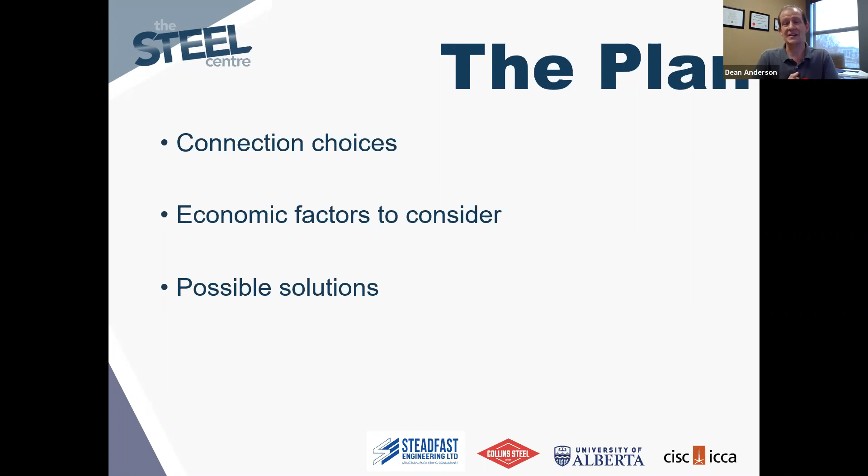So how hard the wind's going to blow, the snow on the top, the loads that are inside the building, if you have machinery or people or whatever it may be. And the software helps with the design of these members. You can kind of hit go, start, and let the thing run. And oftentimes the software can be set up so that it optimizes the weight of the structural steel in the building. So the software will spit out a whole bunch of columns and beams and braces that are the lightest possible.

And that, again, might be the best way to do it, but it might not, depending on the connections in a building. At this point, the connection design isn't completed yet. The engineer is really just looking at the beams and the columns and the main members of the structure.

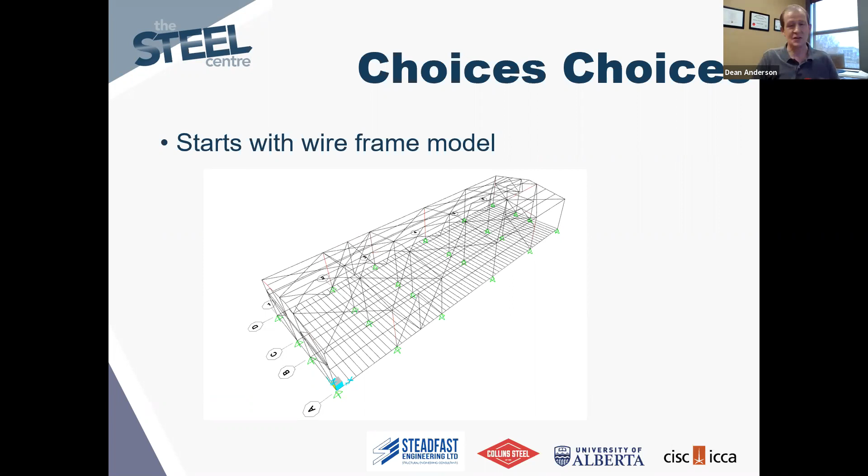Then a fabricator is hired. So the guy who's actually going to make this stuff, he's going to weld it together and put it up in the field. And this is where the connections really start to get discussed in more detail. Again, this is a bit of a generalization. There are times when the fabricators are involved earlier in the process, but in general, this is the way it happens. The structural engineer has designed the building.

He's chosen all of his columns and his beams and his members. And then they hire out a fabricator. They say, okay, we want to hire Collins Steel to do this structure and fabricate it and build it for us. And that's when it starts getting looked at in more detail.

They'll hire, depending on the fabricator, they might hire somebody like me at Steadfast. We specialize in structural steel connections. They hire us to design those connections for them. Collins Steel has their own engineers on staff, so they'll look at it themselves. But this is when, in a project, the connection design really starts to get looked at in more detail, starts to get figured out.

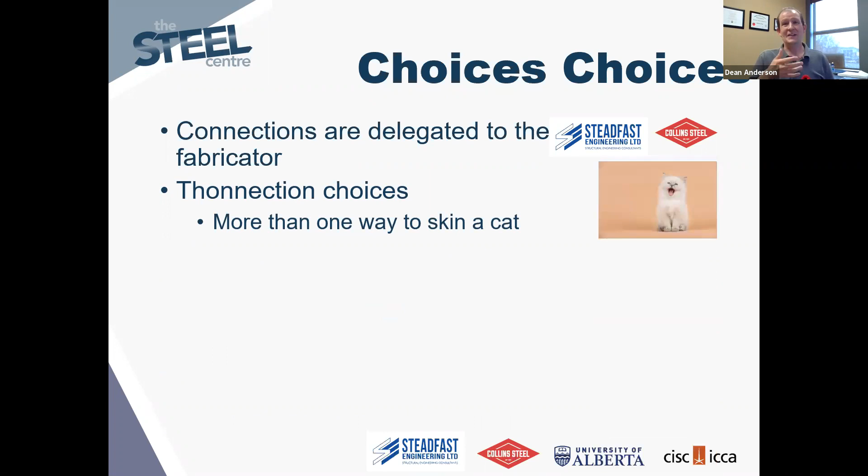And the reason for this is that there's so many different ways to connect steel together. You might have heard the phrase, there's more than one way to skin a cat. And I don't know, I find that phrase kind of horrific. So we'll change that. We'll say more than one way to peel an orange. I think that's a lot better. The cats will like that for us.

But often the fabricator has different machinery, has different processes, has different ways to fabricate the connections. And so they want the connections to suit their process to lower their overall cost. So that's why the connections are waited to design until this point, until the fabricator is hired so they can have that input on how the connection is designed.

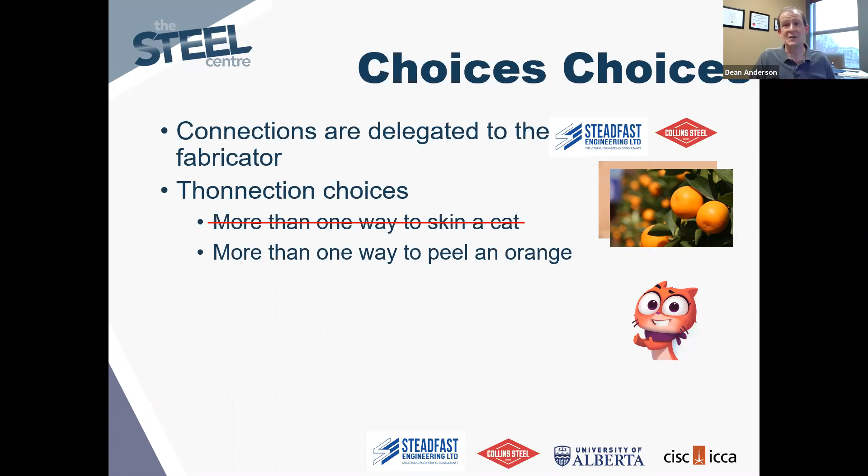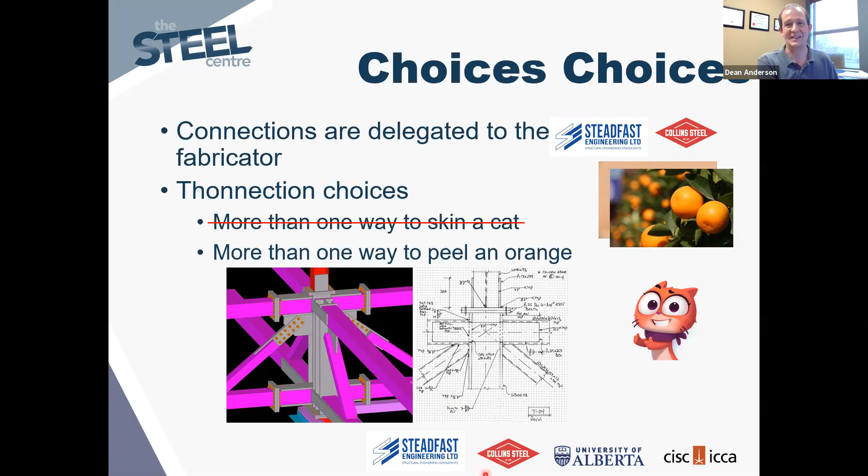So let's get into some simpler connections. Let's look at what is involved in some different connections that are out there, so we can see some of the variety and the choices that are out there.

Beam to beam: we have one beam and another beam that's going to connect into it, so one beam is supporting the other. You might think there are limited options, but there's actually a lot of different options. We're going to look at three. As you watch, try to think of the number of parts involved in each connection, and the amount of labor it might take to fabricate and create it.

The copes at the top can be quite labor intensive, because if you don't have a certain machine that will do that for you, there's a guy out there with a torch who's got to mark all this out and cut every one of these copes. If you have 1,000 of these beams, you can imagine that's going to have a pretty significant impact on the project.

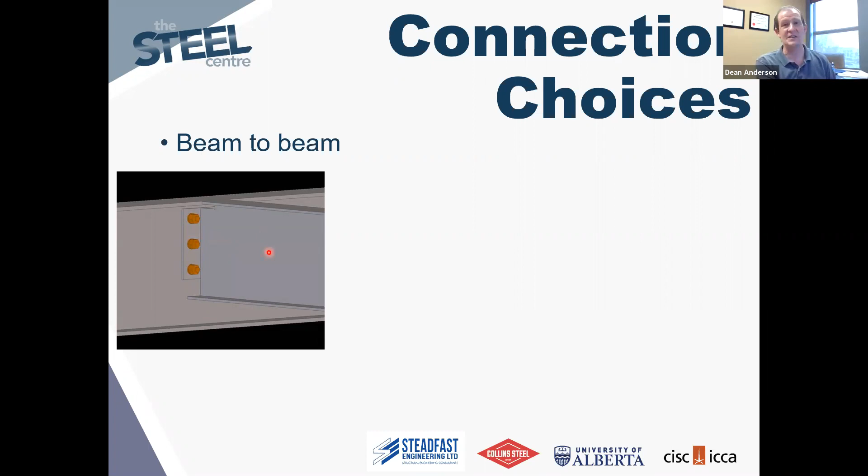In the end plate, you would have to weld that plate to the end of the beam. In this one, you don't have to weld. You still have the cope at the top, so that's kind of a wash, but you don't have that welding, so that could be an advantage depending on the fabricator.

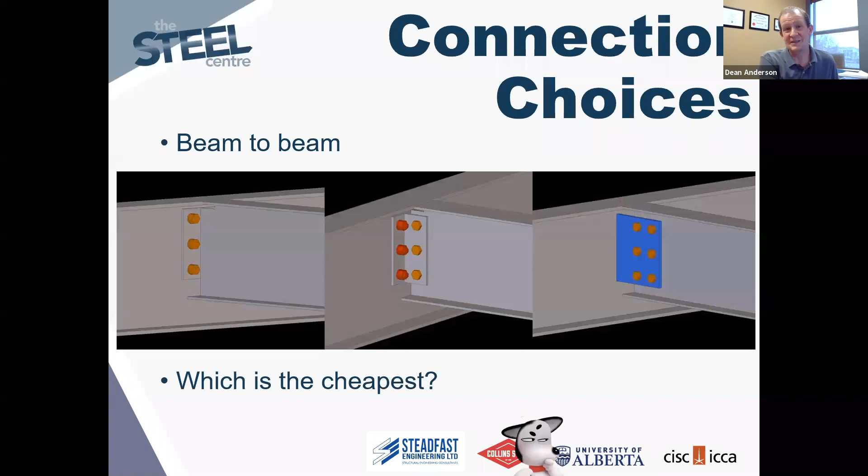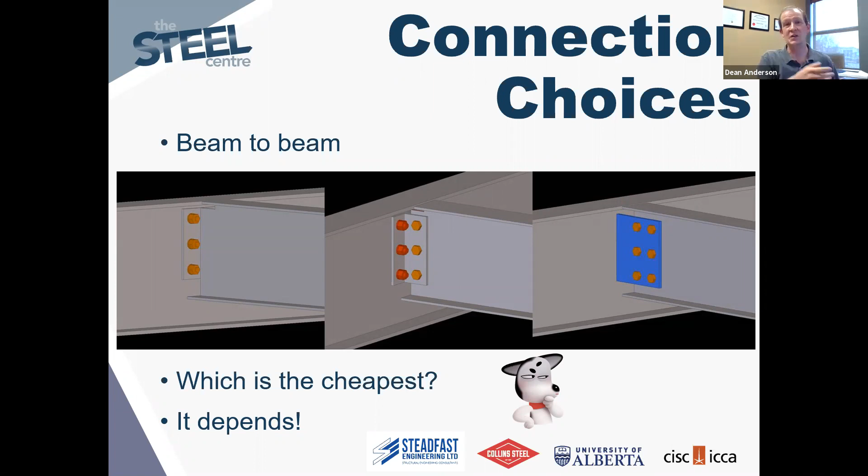So which one is the cheapest? You think about it, and it really depends—on the fabricator, on the machinery that they have. These are some examples that Brendan's going to look at in more detail for this beam-to-beam connection, showing the economic factors that will go into your choice of how you want to do this.

So in general, if you want to do your welding, it's better to do it in a shop. In a shop you're in a much more controlled situation. You have your welding machinery sitting right near you, and you can arrange your pieces on a bench in front of you so you can improve the position you're welding in. You don't have to get up in man lifts and fly around in the air.

Weather is actually a pretty big factor too. In welding you have to have a certain amount of shielding when the welding takes place - there's a little bit of gas, depending on the procedure or welding method you use, to protect that application of weld metal to the joint. When you're in a shop, you can control that a lot better than in the field. If you're in the field and it's a rainy, windy, or snowy day, that will all affect your welding and how it works.

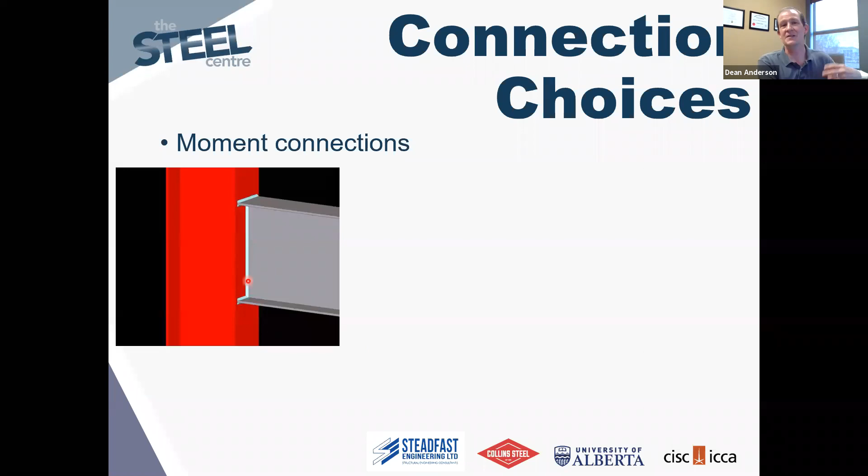So this first example is one way to connect a moment connection - a fully field welded connection. The second way is different: instead of field welding, you can shop weld all these plates on, and then add some bolts, so they can just lift this and put it into place.

So again, where is your labor spent? In this connection here, your labor is not really spent in the shop because they don't have to do much work there - they just cut the beam and column and send it out to site and let him deal with the issue. In this other one, you would have to do the work in the shop, but then in the field all you have to do is put the beam up, insert the bolts, and you're done. It's good to go.

The third option here is very similar to the middle one, except we have a bunch of reinforcing in the column. This is one thing that can affect - or the choice of your column size can affect - this connection. If you choose a column that's nice and strong and sturdy, when you apply this moment to the side of the column, the column can take it. You don't need to add in all of these plates.

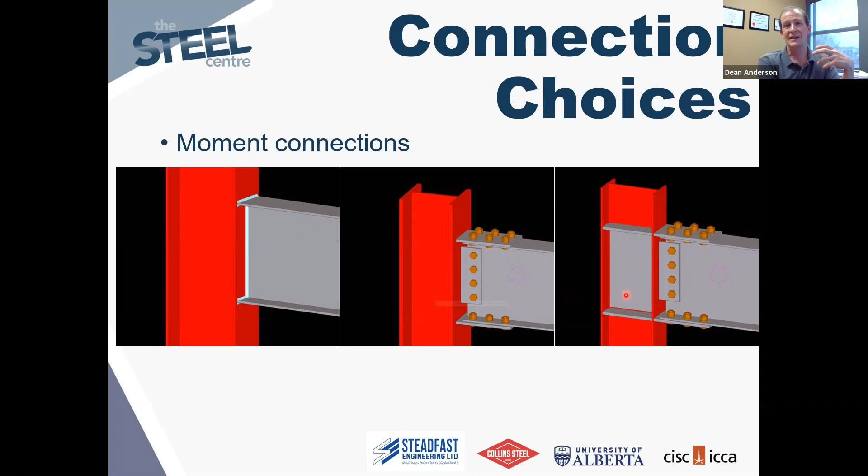If the column's not quite strong enough, you would have to add in all these plates. So we have some horizontal stiffeners here, and we have what they call a web doubler - a plate that reinforces the web, since the web might not be strong enough to take the forces in there. Again, this is a decent amount of work, so if you can talk to the engineer of record, you can say, hey, can this column be made a little bit heavier so we can avoid all of this shop labor?

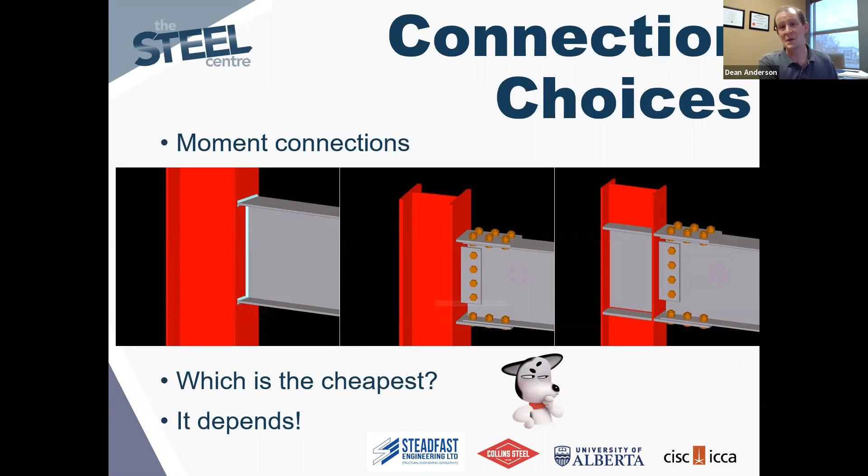So again, which is the cheapest? If you think about it, it really depends - depends on your situation, depends on the fabricator, depends on the erector, depends on how they want to do things. So it really depends on which choice you want to choose for the moment connection.

To introduce a couple of brace connections, we're keeping it simple here - we're just going to look at a couple of examples of very simple brace connections. In the seismic world, brace connections can actually get quite complicated and quite large with a lot of work involved. But this will give you an idea of the choice between field bolted or field welded, and where you want your labor to go.

So if you think of the number of pieces in this brace connection, we have one plate and four bolts. You have to take a torch and slot this HSS brace, this hollow structural section, and insert that and weld it. In this one here, we have way fewer pieces - you still have to slot the brace, but you don't have to weld it until you get on site.

So the erector will have to do this. He'll have to get up in a man lift and weld up here, then reach over his head, get underneath this, reach over his head again, and weld this weld that's underneath.

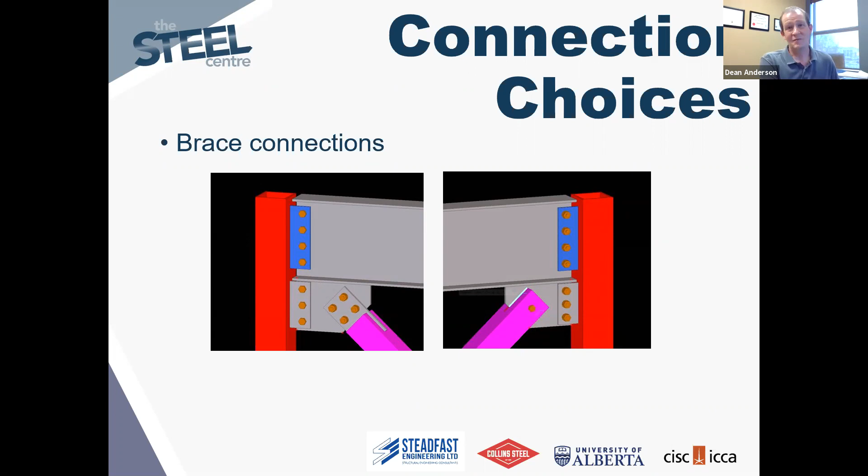So again, which one is the cheapest? It really depends on your position, where you are in the overall project. I think if you're the erector, this is going to be more expensive. And if you're just a shop guy who doesn't erect, this would probably be the least expensive for them, because then the field guy would do all the work.

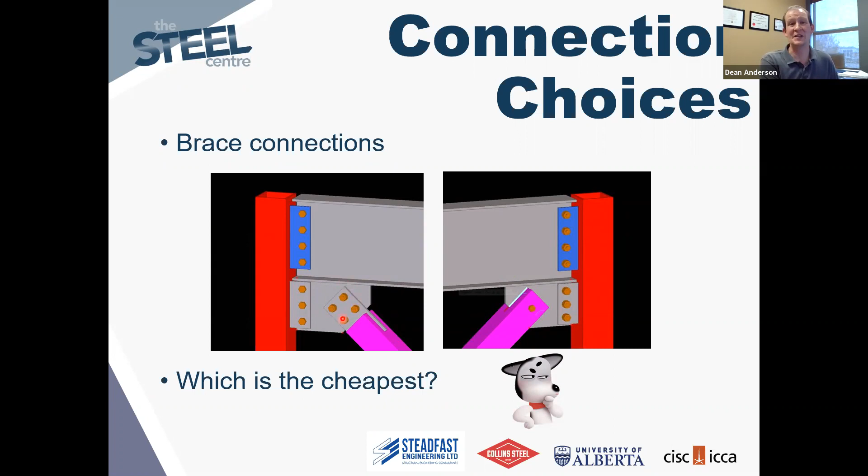So I'll hand it over to Brendan, and he's going to talk about some of these economic factors to consider. We kind of scratched the surface on some things to think about with respect to where the labor goes and how it's distributed between the shop and the field. He can talk a bit more in detail about the economic factors involved in the fabrication of structural steel connections. So I'll hand it over to Brendan.

Okay, thank you, Dean.

So as Dean mentioned, there are many factors to consider when thinking of economical fabrication. Dean's already talked about some of the ones listed in the first bullet, so I'm going to quickly talk about what's in the second bullet. So where would you spend your effort?

The ratios here are averages of the relative time it takes to complete tasks. In general, for engineering to design a connection, it takes about 1/8 of the time it takes to detail it. The time it takes to detail is about 1/4 of the time the shop would take to fabricate that connection. And if you compare how long it would take the shop versus the field to do the same thing, the shop is probably going to do it in about 1/3 of the time as the field.

So generally speaking, you want to try and pull work from the field to the shop, and this can be done with either bolted connections or welded frames. It's also more common, because of the increased labor in the field versus the shop, to spend more time in detailing and engineering to come up with efficient connections, which obviously reduces time in the shop and the field.

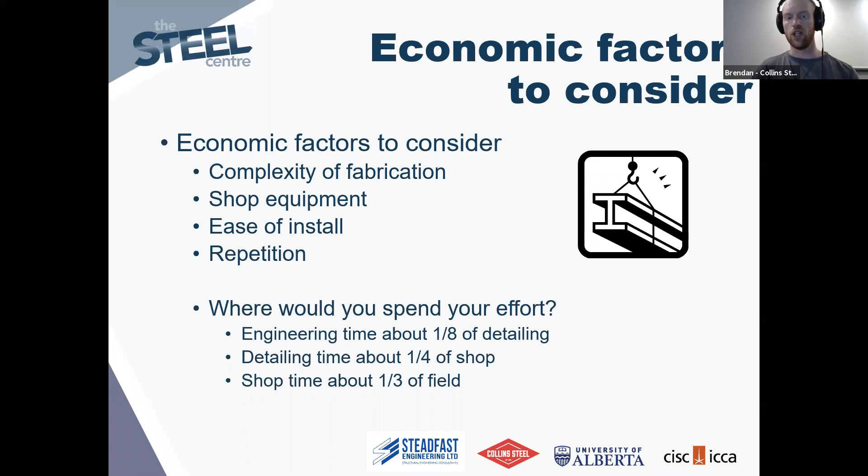So we're going to talk quickly here about weight versus labor. As an average, the cost of about 150 pounds of steel equals 1 shop hour. So we need to consider whether it's more cost effective to add material weight to save fabrication costs. If the fabrication costs and the weight were a wash, I would still recommend taking the labor savings, because that means it'll flow faster through your production facility.

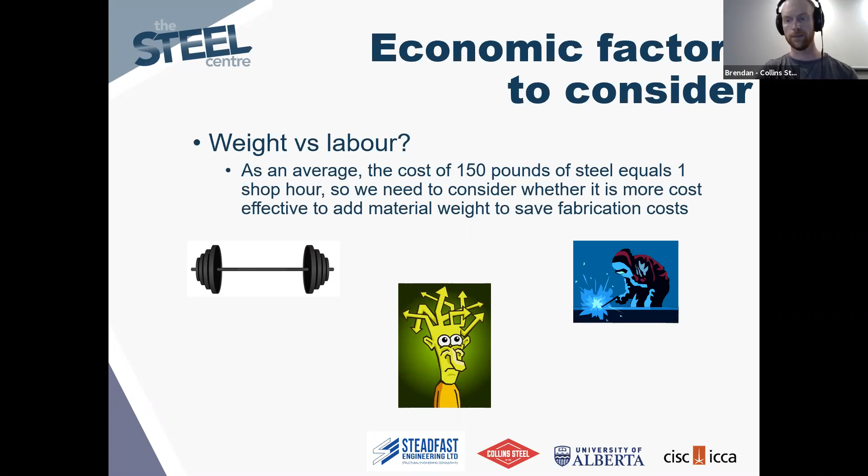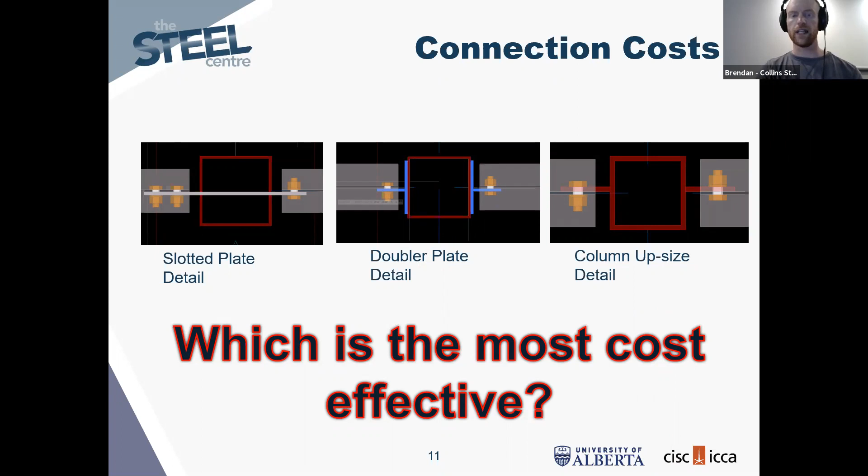So which is more cost effective? Let me start by talking about some of the parameters. I've assumed about a 250 kilonewton axial load, and the column is about 3,700 millimeters, which is about 12 feet—a rough floor to floor height in a building. The HSS costs about 73 cents a pound, and the plate about 53 cents a pound.

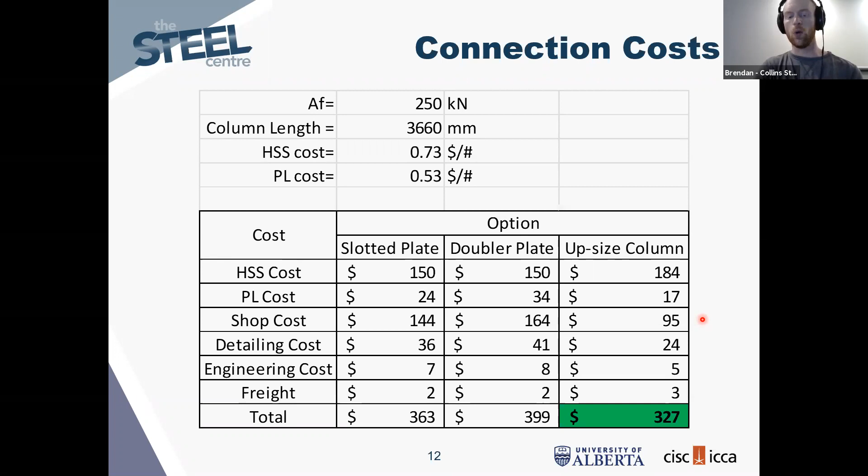So in this case, upsizing the column comes out to be the cheaper option. There's an upcharge in material cost, but it more than offsets the savings in labor—labor is about $95 versus about $145 and $165 in the other options. So in those other two options, the material is cheaper, but the labor is more expensive. The most expensive option for us at Collins would be to weld on the doubler plates, because there are just more parts to fit and more welding.

So now I'm going to spend some time talking about the shop equipment that fabricators might have. I'm going to give you a rough idea of the cost of each piece of equipment so that you can appreciate the cost of owning them, which might help you understand why fabricators don't have all of the equipment that's out there.

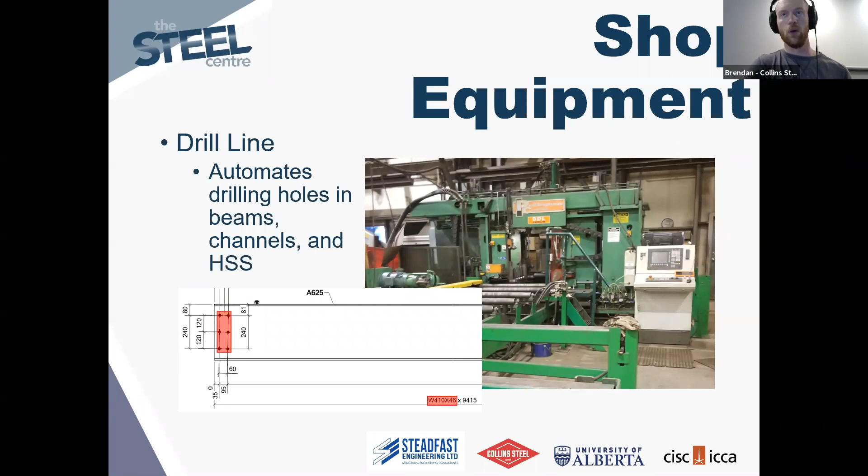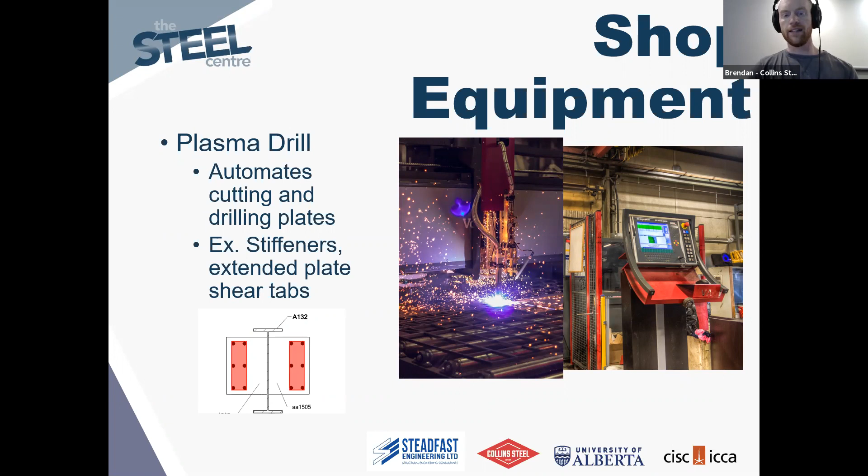The next piece of equipment is the plasma drill table, and these cost about $850,000. The drilling head is a high-speed drill similar to that on the drill line, and then it has a plasma head. The basics of plasma cutting is that it involves sending an electrical channel of superheated gas from the plasma cutter through the piece of plate. You can see in the middle picture the bright light - that's the plasma going through the plate, and all the sparks are what happens when it's doing the cutting.

In the picture on the bottom left, it first has to drill the holes highlighted in red, and then it cuts the perimeter of the plate with the plasma cutter. On this machine we'll cut stiffeners, extended plate shear tabs, end plates, and plates that we slot through braces. So it's a very useful piece of equipment.

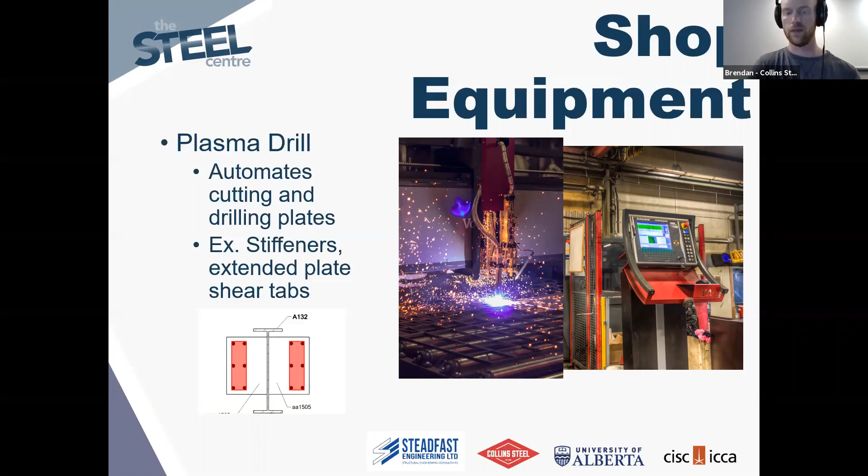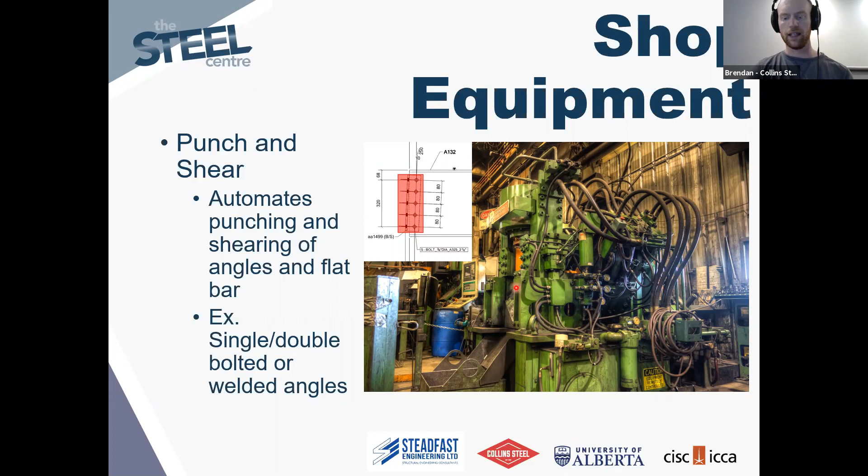A coping machine costs about $1 million, and robotic welding systems will be north of $1 million - I've heard from years ago they were around $3 million. So it's a very expensive piece of equipment.

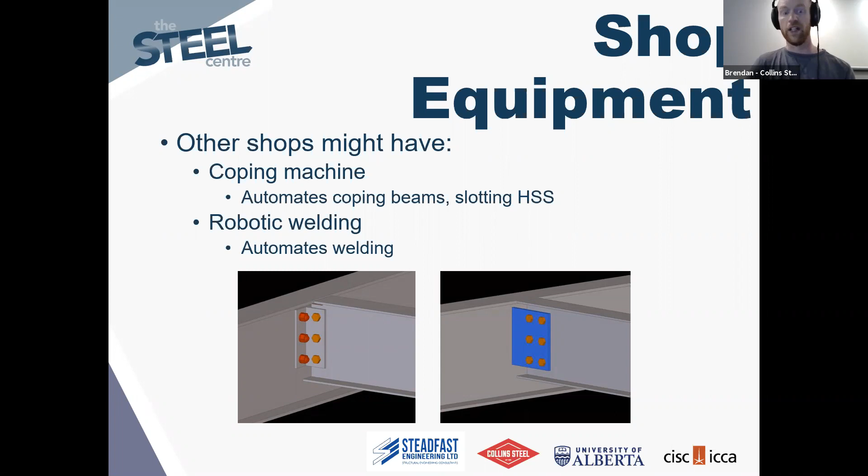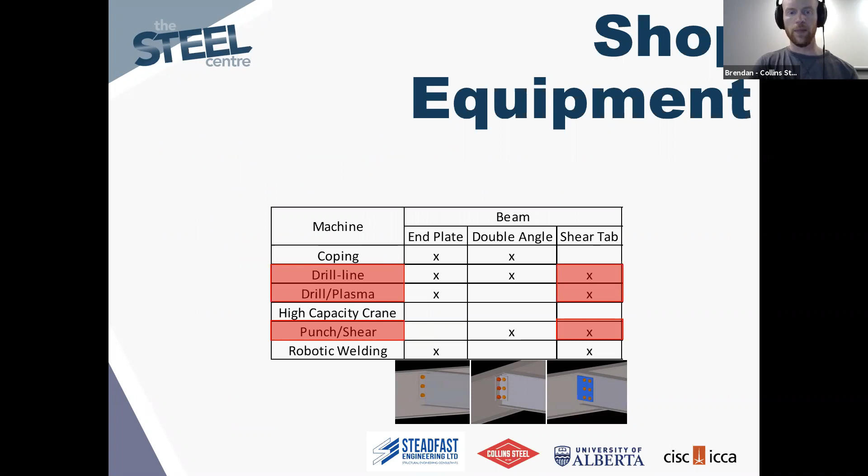So I'm going to now take you through an example of beam-to-beam connections for Collins' shop. We have a drill line, a drill plasma table, and a punch shear. So for the different connections that we've talked about, end plates, double angles, or shear tabs, the shear tab seems to work really well for our shop because it best utilizes or maximizes the equipment that we have.

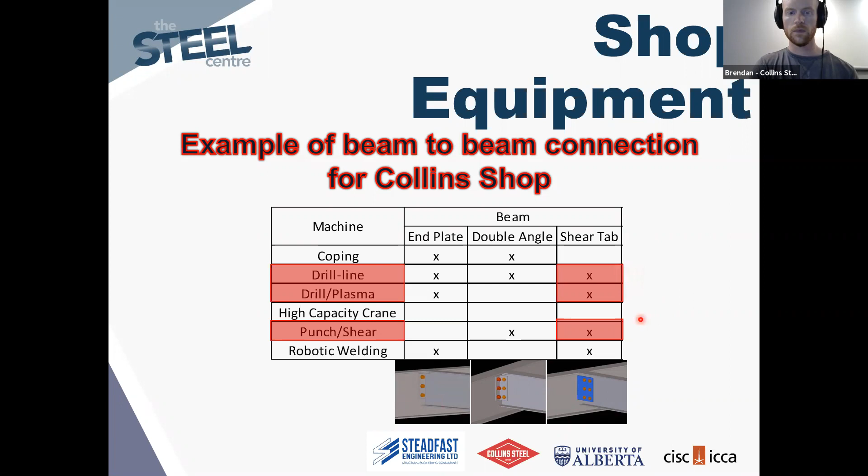So I'll now take you through an example of some framing on a project we're currently working on, and then I'll show you how we would cost a shear tab versus some angle connections.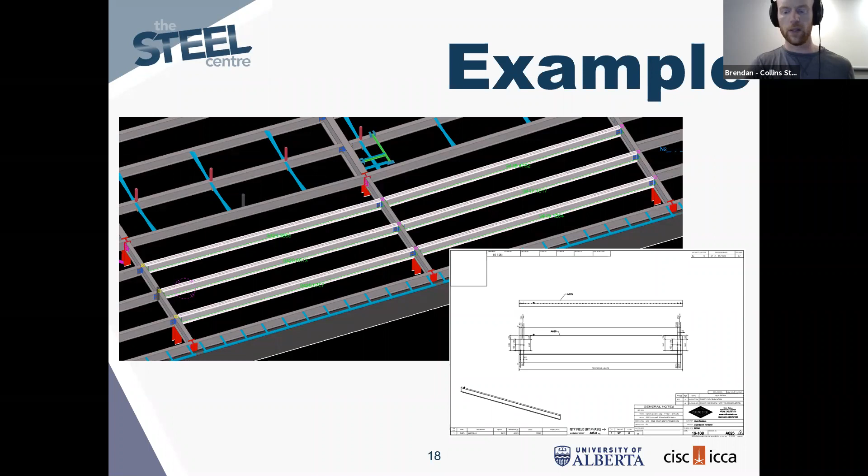So approximately each beam would cost us about $50 to fabricate. That doesn't include the material, that's just for the labor.

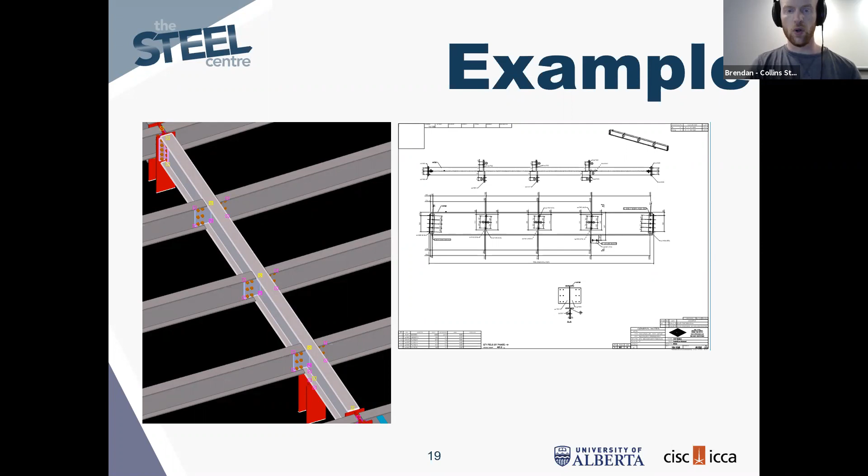So then those simple beams have to connect into the beam that I have highlighted on the left-hand side. In that bay, this is the only beam that has manual fitting. By concentrating all the connections to this beam, it allows us to only have to handle one of the 4 beams in that bay. So the cost to fabricate that beam is about $450 in our shop.

So here I haven't shown examples of the angle connections, but you can see what it would look like in the bottom left. So for our shop, the shear tabs option would be about $600.

And if we went to the bolted angle and had to do copes, the main girder would have a little bit less fabrication cost, about $240, but then all the beams that frame into that main girder have to be coped. So the labor for those would cause the cost to go to about $400. So for a total of $640.

So the shear tabs result in a 7% savings in fabrication. These are just estimates, but I hope it gives an example of their respective costs.

So the small savings doesn't seem significant, but it adds up when they happen hundreds of thousands of times on a project.

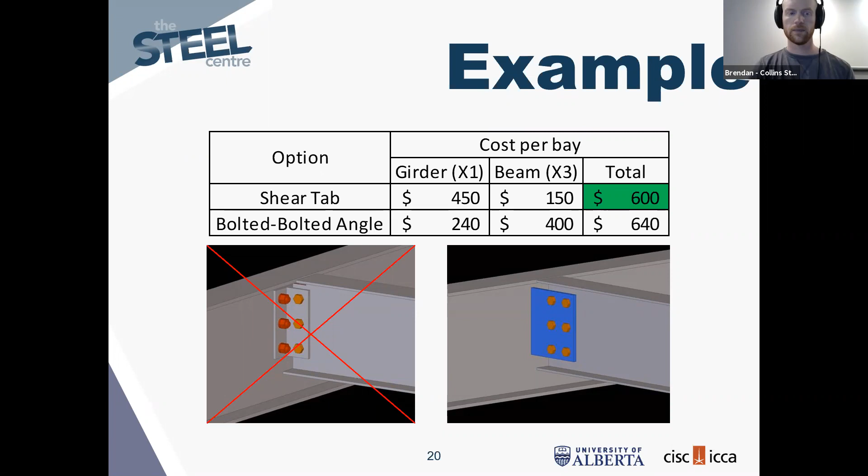So in summary of the economic factors, a fabricator's CNC equipment plays a large role in determining what is most cost effective for them. As we have demonstrated, the connection choice can make a difference. Spend time up front in detailing and engineering, focusing on fabrication and field efficiencies. As a connection design engineer, if you consider these things, you're well on your way to having a successful project. Okay, Dean, back to you.

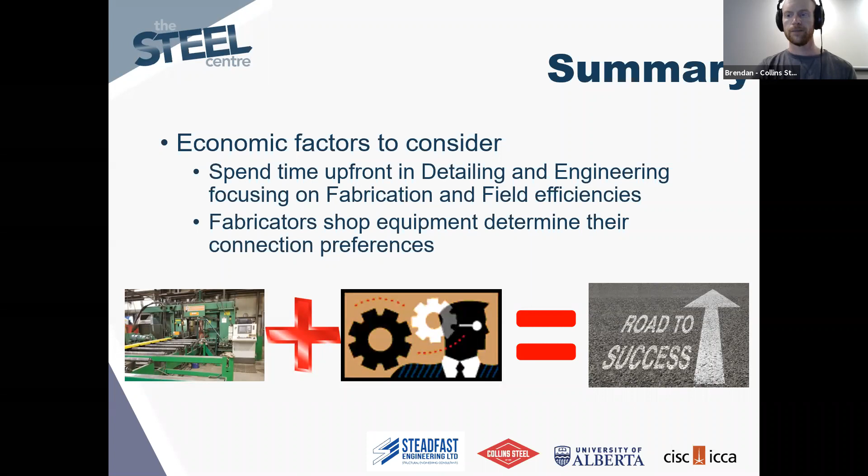All right, so solutions. How can we make sure we implement what we know about the fabrication of connections and how it's all put together?

The first way really comes down to how a project is organized. The typical way of doing a project is, as we described earlier, where the structural engineer is going to design the overall building, and he chooses the beams and the columns and all the different members involved. They essentially become like a fixed thing. They can't be changed. He's done his job and he's moved it on. And the fabricator now designs the connections.

And we saw one factor with the moment connections, where this reinforcement here could be a major cost. If you remember when Brendan was talking about shop labor, if you could spend that time up front with the design engineer and do a project in the sense where it's a design-build project, and think about these connections earlier on in the process, you could choose a column that would be just a little bit heavier and wouldn't have all that reinforcement. That 150 pounds is one shop hour. This column might be a little bit heavier, but how much shop labor is that going to save? You can save a significant amount of cost if you do this sort of thing.

So if you have the fabricator and the connection design engineer involved early in a project, that's something that can really result in the overall cheapest and most cost-effective options for a steel structure.

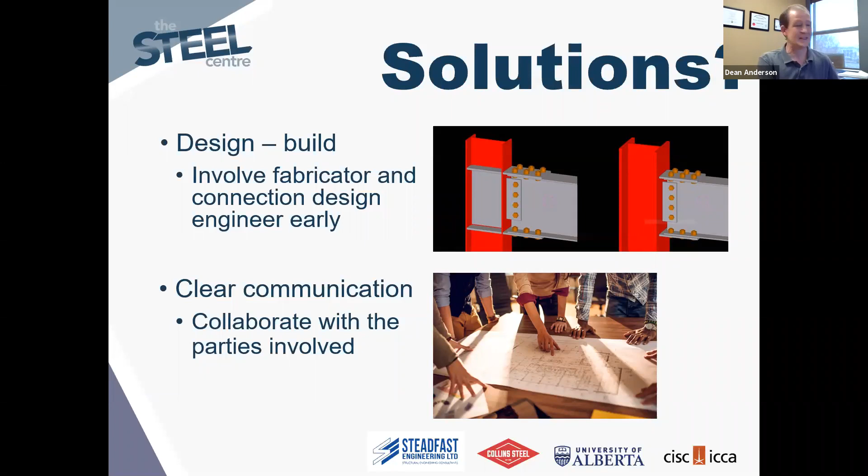If communication is blocked between all three of those parties, me and the detailer might think, okay, they want to do it a certain way. If it actually goes through and the fabricator has to fabricate all this stuff that doesn't suit their process, that can really drive the cost of an overall project up. So it's something that really should be discussed and on the top of your mind when you're out there working in the real world on a project: have that open line of communication. If you're ever in any doubt, ask, talk to the people around you, and facilitate that collaboration process, because that can really help drive the overall cost of a project down.

This is one Brendan really talked about: spend the time up front. Again, this is another strategy that can be implemented when working on a project. In our fast-paced world, we can get caught in that trap of rushing through projects. The challenge of this is timeline. Typically, when I'm asking for a timeline from somebody who wants a design, the most typical response is ASAP in all caps with exclamation points, as soon as possible.

They have that pressure on them of getting the project done, and this can develop into a mentality of just get it done, we'll fix it later. That happens really from the start of a project and can filter and trickle all the way down through a project with this hurry, hurry, hurry, hurry, hurry. So you don't do things properly up front, and it costs a lot of money down the line. The earlier you deal with these potential issues, the cheaper the overall project is going to be.

The longer you wait to come up with the best solution, like a connection design, the more expensive it can get. There's a lot of people along the line that have really good input: the detailers, the people who draft these things, have a lot of good experience. The erectors are some of the most valuable guys to talk to, because they're the ones who actually have to lift up the steel and put it in place. All the fabricators have such good information to share about the best way to do things. So again, spend that time up front to work these issues out earlier, and that's going to save money down the line.

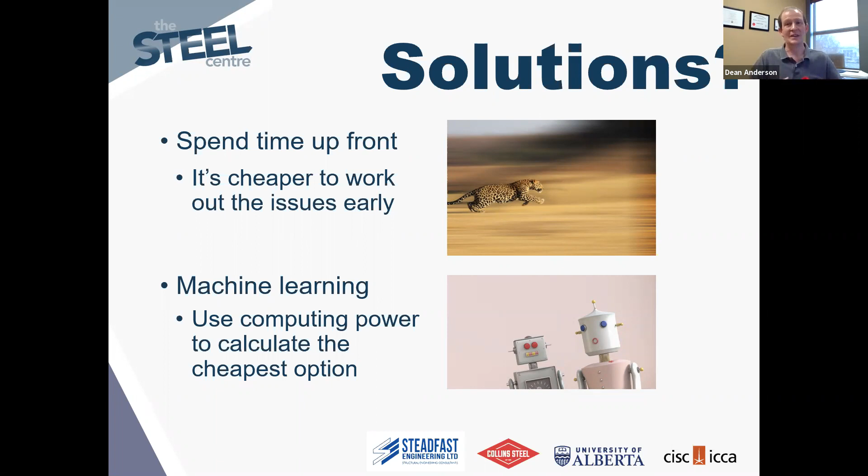Maybe the processes and equipment for each fabricator can be input into the machine as well, so it can choose the best option overall for a certain building and the certain stakeholders involved in a certain construction project. It's an area of research that's really growing, and it's going to grow into an excellent resource. It's really the way things are going. It'll be exciting to see how this can impact the overall cost of a project when they include connection design in this machine learning.

So that brings us to the end. We've seen that the weight of a building may not be the most important factor in the overall cost. The connections are an important factor in the overall cost of a project. It's something that heavily impacts the overall cost and impacts a lot of people that are actually putting this thing together. So hopefully we've provided a bit of insight on how connections are fabricated.

So when you get out there and you're part of a project, you can be part of a project that's on time and on budget, because you can think about how things are put together and the different ways that things are assembled. Think about that when you're working on your project, so you can implement some of these tools to have those projects that are on time and on budget.